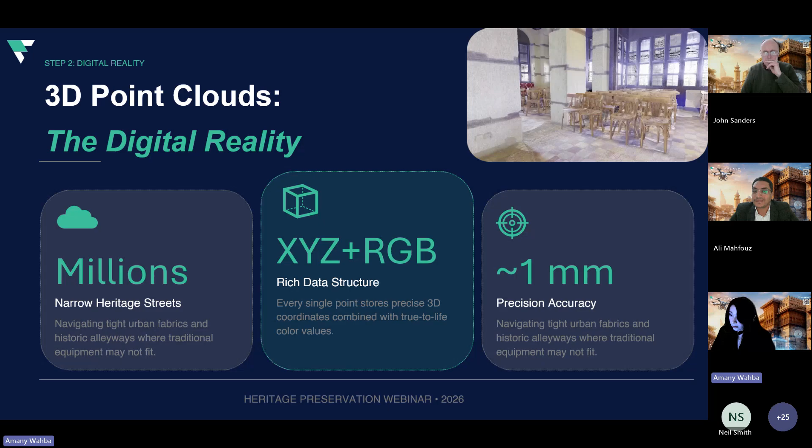It's a digital data set made up of millions, sometimes even billions of points, made up of x, y, z coordinates. Each spatial point represents the x, y, z coordinate, and also the RGB color that gives us this texture and the visual appearance that you're seeing on the screen. When all of these points are combined together, they form a highly detailed three-dimensional representation of the building exactly as it exists today.

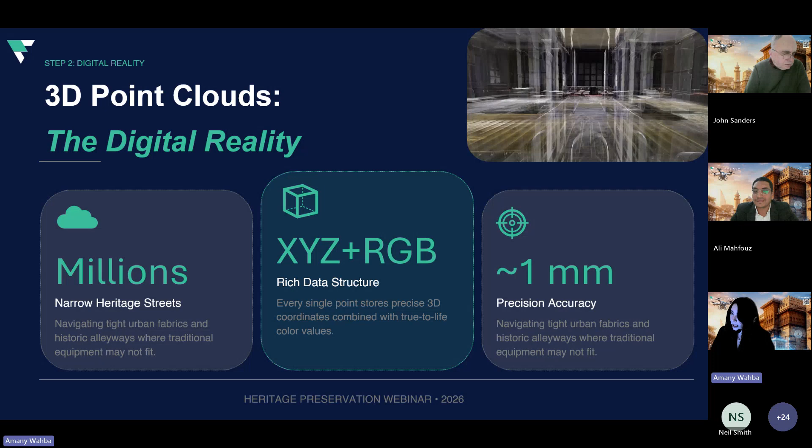For heritage documentation, this is extremely valuable because it captures the building in its real condition. Heritage buildings include irregularities, structural deformation, and fine architectural details. So making sure there are no gaps and capturing at millimeter-level accuracy is the key to having very good quality HBIM models.

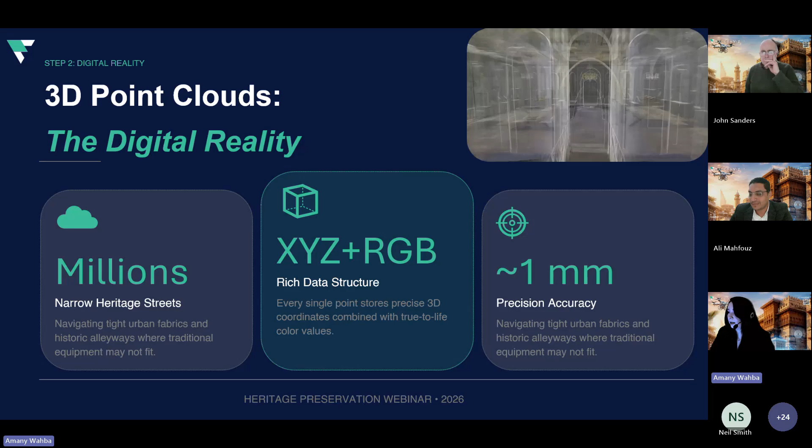For HBIM projects in general, we have two primary deliverables. We have the point cloud, and this data set is the foundation in creating the HBIM model. The second is the 360 imagery that I spoke about before, which provides visual documentation of the environment and allows the user to better understand the condition and appearance of the building. Together, the point cloud and the imagery form an essential data set used to create the HBIM model and the documentation.

In the next slide, I've been throwing the word HBIM around, but what is really HBIM? HBIM stands for Heritage Building Information Modeling. It is an adaptation of traditional BIM methodology, specifically designed for historic buildings and heritage structures. Unlike modern buildings, heritage sites contain very irregular geometry, their own historical construction techniques, and architectural elements that are unique to their cultural context.

That's great. So that takes us to another point. Once we collect all the data you mentioned, how is this data processed into CAD drawings, 3D models and HBIM deliverables? Perfect, that's a great question, Ali. Allow me to guide you through the following slides, with a nice visual presentation to follow along.

We have talked about the point cloud as the foundation for a complete HBIM model. Once the point cloud has been processed and cleaned, it becomes the main reference data set for the entire modeling process. We import these point clouds into modeling environments such as Autodesk Revit, and use the scan geometry as a guide to reconstruct digitally all of the architectural, structural, and MEP components.

Elements like walls, floors, roofs, and openings, everything you're seeing on the screen, are created directly from the point cloud reference. This ensures that the HBIM model accurately reflects the true geometry and proportions of the real structure, which is very important.

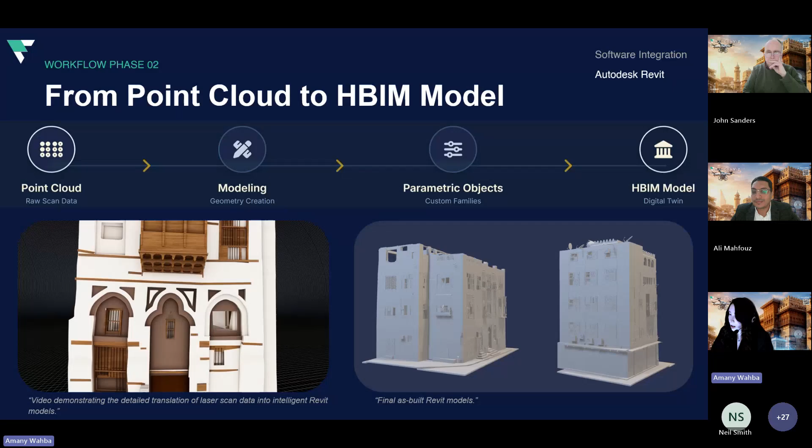In the video on the left, you see the steps of the workflow from point cloud into the 2D drawings, elevations, sections, and floor plans, and then from the point cloud into the actual Revit model. We're showing the untextured version and then the textured version. On the right are the final as-built Revit models. You can see the conditions of the slanted walls, the Rouchans and so on, all accurately as they exist on the real site.

Now, this is a very interesting slide to show right here because I feel like this is really the core of what truly separates HBIM from conventional BIM. So I'm now talking about the custom parametric heritage components. One of the key challenges in heritage modeling is that historic architecture rarely follows standardized elements, right?

For example, in Hijazi architecture, what you're seeing right here, we encounter unique features such as the Rouchans, which are the traditional wooden balconies, and also the decorative wooden elements known as the Takaleel. And of course, there are also the many unique historic windows and doors and even the historic walls. And with historic walls, the walls are irregular, right? They're not straight walls. They're warped, they're slanted. So all of this geometry is very uneven.

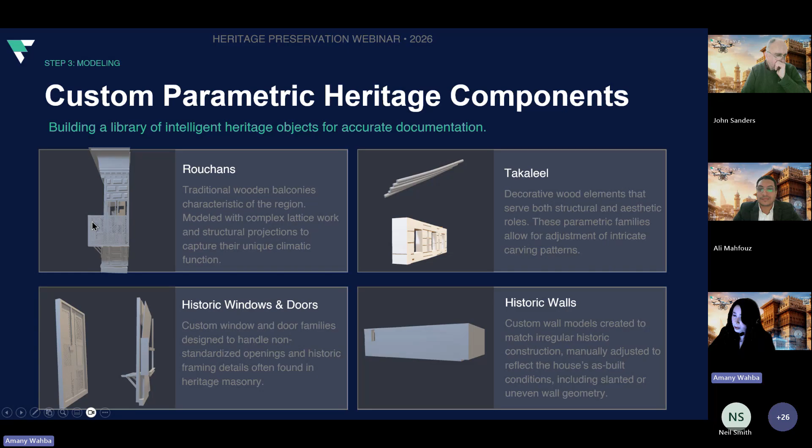It's also modeled within the HBIM family category. Because these elements are what really make it unique, they're not available in standard BIM libraries. So we have to create these custom parametric HBIM families. This really allows us to accurately model each architectural, structural or MEP element according to its real geometry and condition as well. You're seeing it right here in the Rouchans, how some elements are missing, broken pieces. All of this is accurately presented in the model itself.

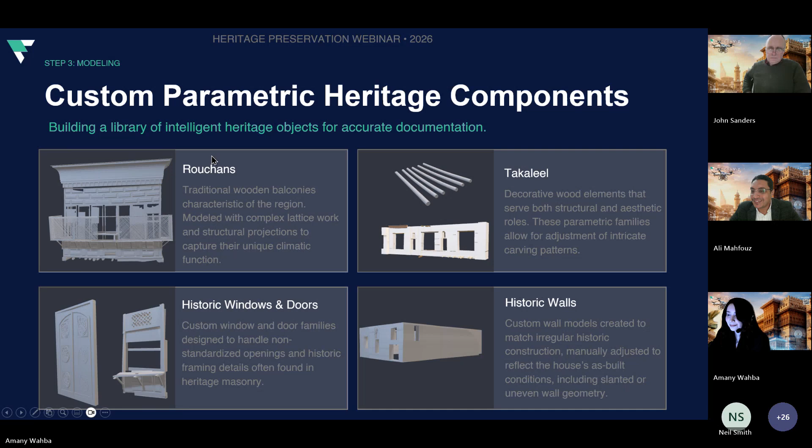That's great. So maybe someone asks: after we have 3D modeling and 2D and heritage building information modeling, what is HBIM? What's the importance of HBIM for heritage documentation? That's a very good question, of course. So we truly want to show what is really the value of HBIM, right? Why HBIM matters for heritage.

Yes. I really think that HBIM provides more than just a nice visual 3D model to look at, right? It really serves as a reliable digital record of heritage structures, and it can help in supporting restoration planning, for example. It can also help with structural assessments and long-term conservation strategies, right? The planning of conservation, enabling us to provide strategies by visualizing the decay, the patterns, the cracks, and whatnot.

So for heritage authorities and governments, for example, I feel like this information becomes a very valuable tool for managing historic sites and ensuring that they're preserved for future generations. But not only that, it also opens new opportunities for education, for research, for cultural tourism, right? By making heritage data more accessible through digital platforms.

Oh, that's great. Thank you, Amany. You're welcome. So I will move to John.

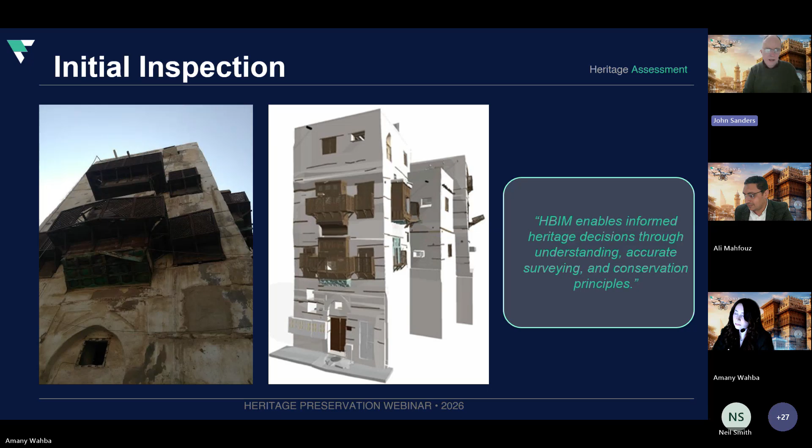The group of buildings at Al-Balad is complex because they were an intensely developed group within a limited area. The area was limited by the city wall. And they've been subject to repeated and frequent alterations as the use and status of the buildings changed. Many of these alterations are actually quite poor quality compared with the original construction. So both in conservation and aesthetic qualities, they're not as good as the original. The alterations tend to disguise highly significant elements in the original buildings.

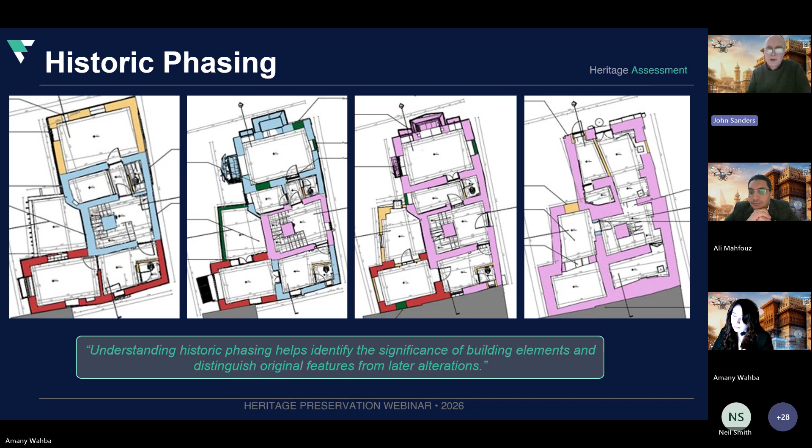So in doing that, we also produced phased elevations, which show typically this extent of alteration, same colouring as on the plans, but quite often Jeddah seems to have been a two-storey city originally and has consistently been added up with additional storeys to bring it up to 4 and 5 storeys. We'll look at the next slide, please.

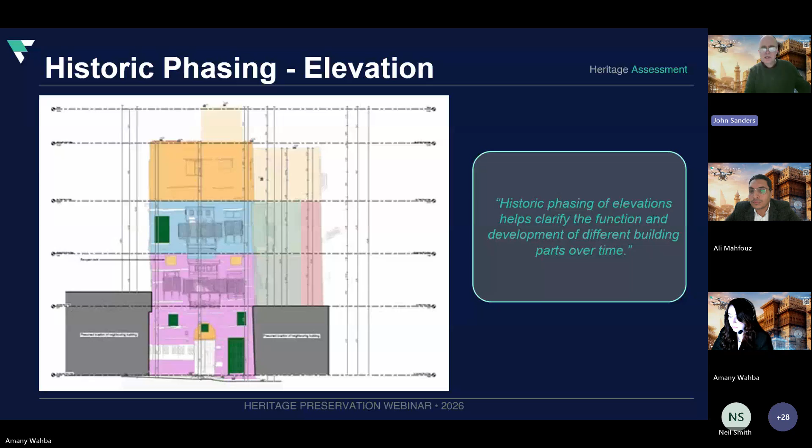So, as well as the history, a really important thing to record is the materials. Quite often that's quite difficult because the materials are covered externally and internally, but it was a crucial thing for our client to understand the materials. Quite a lot of it is coral stone, but we're also recording places where there are concrete floors, brickwork, timber. Maybe look at the next slide, please.

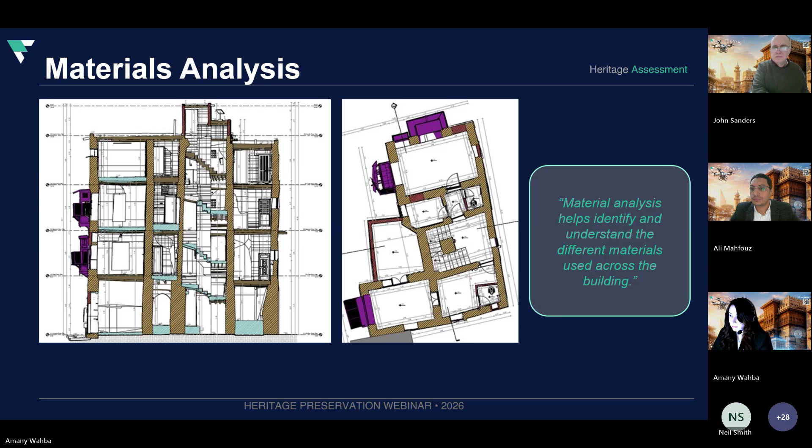So the understanding that we've developed of materials and history is summarized in this kind of significance assessment. We look at various types of significance, which includes the potential for intangible. That includes historical associations, which are intangible, but also how the building represents a historical type, in this case a merchant's house, the quality of the original and later design, and the particular character which the building might have taken on over time, and which makes it more interesting or more attractive with age.

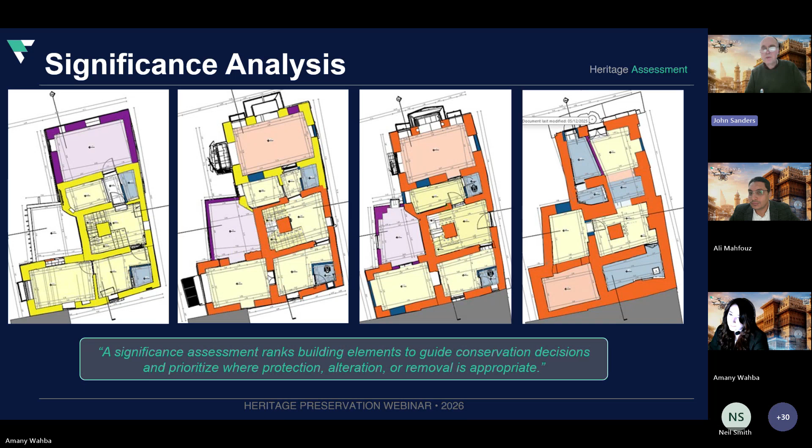The purpose of this significance diagram is to advise on good conservation decisions. We can show how conservation effort can be concentrated in the parts of the building where it really counts. We can avoid wasting our clients' money repairing parts of the building which would be better removed or changed anyway, and we can consider where parts of the building would be better restored to their original appearance, because this would reveal historic significance that is not necessarily evident at the moment. Let's look at the next slide. So another part of our job is to advise on how the building should be repaired.

Often this included structural issues. Many of the traditional buildings in Al-Balad are distorted out of position or have elements which are uneven. But this distortion can be part of the interest and character of the place because it is a function of the materials and construction techniques which were available to builders in Al-Balad before the 20th century.

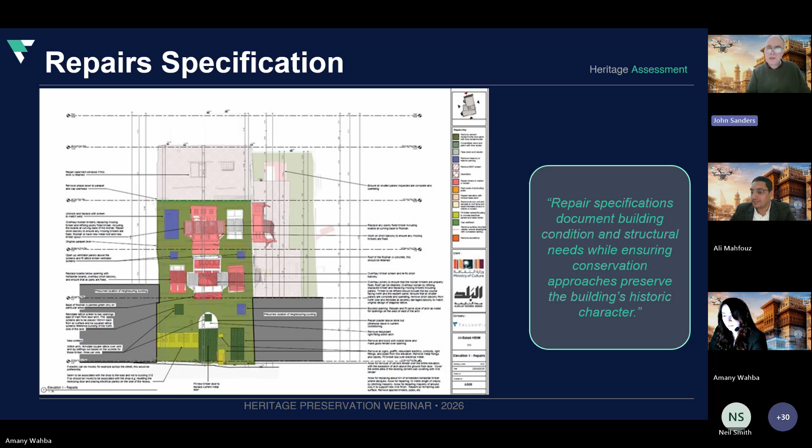We worked with conservation accredited structural engineers, NARO, as part of our team. And they were able to design structural solutions that retain distortion. And this is a specialism that is really important in conservation decisions. So we've plotted the full extent of repairs onto drawings so that the repairs to the fabric could be understood. Let's look at the next and final slide, please.

So in a way, these show the result of decision making. The image to the left is a similar building. This is the one that isn't actually building 310, but I've included it. And this image to the right is a drawing which is made over the FalconViz survey. And what it's showing is restoration, in that some of the decisions we can make could be to remove shops on the ground floor if we feel that that reveals the significance of the design above.

And in this case, missing Roshans are put back. But what we're not suggesting is that distorted Roshans should be straightened up, because part of the distortion is part of the real interest of the buildings.

I should say that this project has really been a wonderful experience, which has broadened my understanding of conservation and certainly brought me into more contact with UNESCO principles. It's given me an insight into a beautiful and vital urban culture, but it's also really interesting to see how our work and the work of FalconViz can produce a place which has changed dramatically even over the last 3 years that we've been working here, from a place that was almost deserted to a place that is already a really vital place for tourists with new businesses. And you can see how quickly conservation-based change is possible in Saudi Arabia.

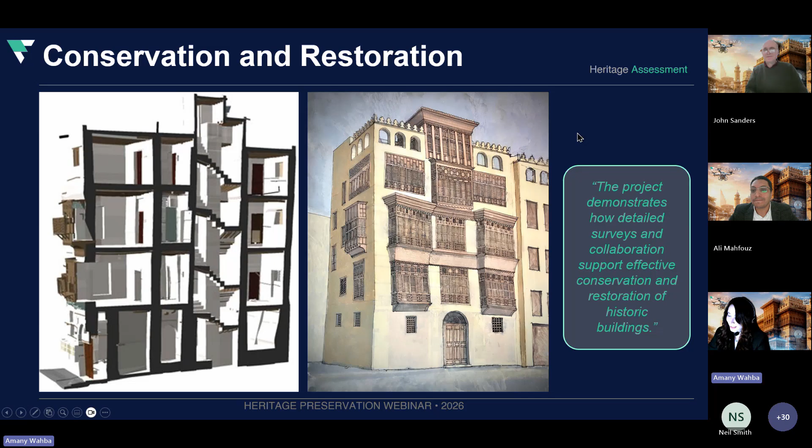So I will go back to Amany. So we collected data, Amany, and we have 3D and 2D, and HBIM. So my question is, can you describe the HBIM platform development process? I mean, how do you move from the concept of brainstorming to the final product? Yes, of course, Ali, I'll be happy to walk you through that. So, once all the documentation data has been produced, so I'm talking now the HBIM models itself, all the 2D drawings, all the imagery, all the reports, including the structure reports assessment that John was just talking about, the next challenge really becomes how can we manage and access all of this information in an efficient way, right?

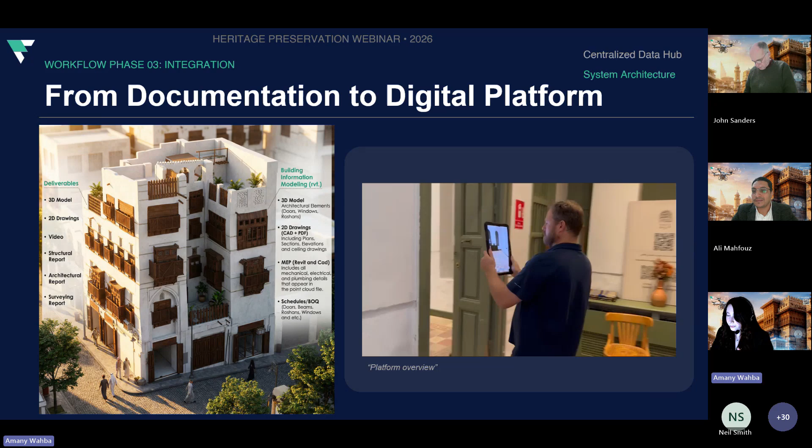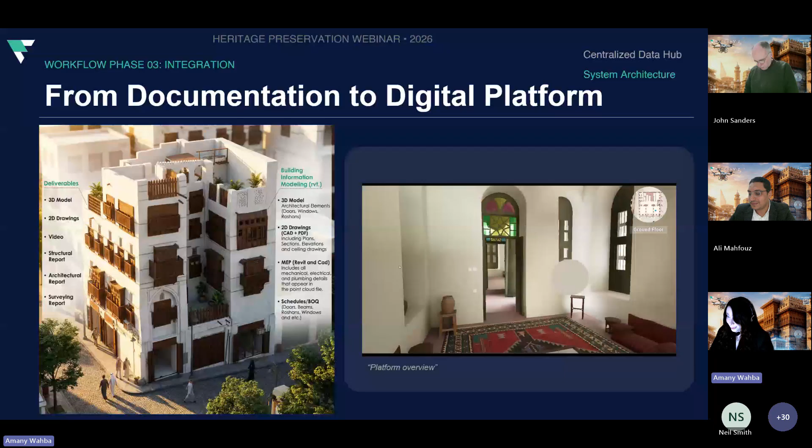Yeah. So what you need to understand is that heritage projects really generate a large amount of complex data. So without any kind of centralized platform or system, this information can really be difficult to organize or even explore. So in order to address this challenge, we decided that we wanted to develop this HBIM platform, which can integrate all of these data sets into a single digital environment. So that was really how we came up with the whole digital platform.

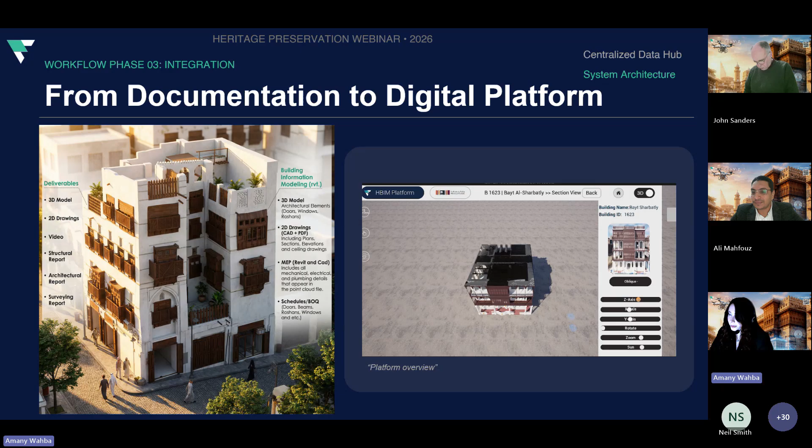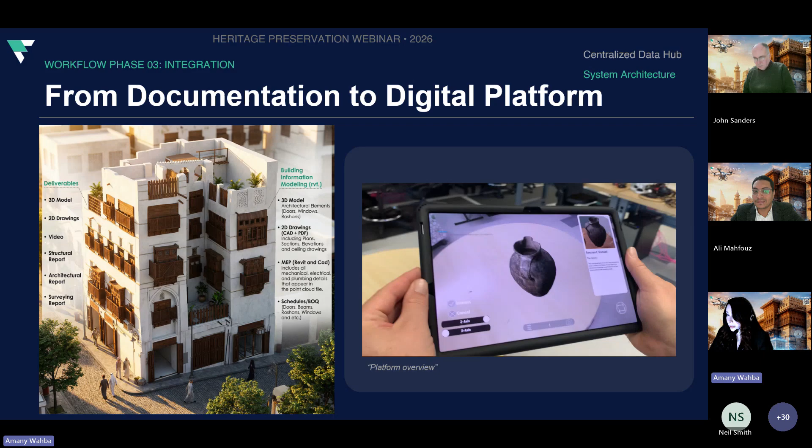And as you can see right here on the right, there is a very quick overview snippet of the platform. And on the left here is basically all of the documents that we have gathered in this entire HBIM model project in order to be able to integrate it. So part of the integration process is, of course, the platform design, right?

Basically, the whole development of the HBIM platform just began with a series of lots of brainstorming sessions. These all involved, of course, the heritage experts, developers, engineers, and we all sat down to try and brainstorm what kind of navigational structure or data we want to show, the data sets, and also what kind of features we can implement, right?

So really the goal was to design a centralized platform where different types of heritage documentation can all be accessed, visualized and explored in one place. So all of this collaborative process really helped us in defining the whole structure of the platform and eventually what kind of data we need to integrate.

Oh, fantastic. So once the concept development is established, we now move on to the next step, which is designing the user experience, right? Yeah. So what you're seeing right here is that we have started developing the user interface and user experience wireframes to map how users would navigate through the platform. These wireframes would really help determine how the buildings can be displayed, how documentation can be accessed, and how users can interact with all of this information. We have thought about all of this.

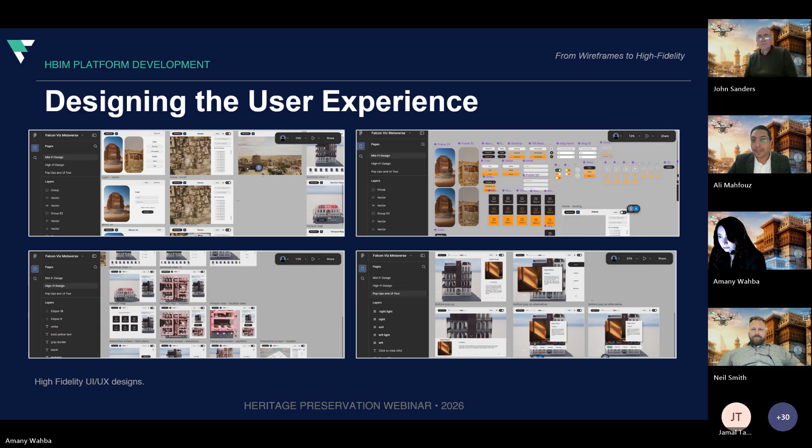So you raised a very important point about usability and complex heritage data in the platform. Can you explain more about how you integrate complex data into the platform to ensure usability? Because usability is the most important thing in this platform. Yes, of course, I'll be happy to walk you through that.

One of the biggest technical challenges we faced in developing the platform was to integrate the different types of heritage data that we have captured or gathered. The project includes all the HBIM models, the point clouds, the imagery, the reports, and all the historic documentation, and the platform was designed from the get-go to combine all of these data sets into a unified environment. This integration allows users to access and explore the information in a seamless way without the need to switch between multiple software tools.

And this was very important because the whole point of creating this platform was to avoid any kind of external links, any jumping from one platform to another. We wanted to make sure that we optimized, enhanced, and thought of all the useful solutions in order to integrate everything into one digital platform.

And I would also like to add that, to really push it to the next level, we said, okay, to make this platform more engaging and accessible, what other features can we include to enhance the whole experience? So we decided to introduce several interactive features, starting with AI avatar guides. We have an AI guide who can act as a virtual tour guide and help visitors learn more about the history and significance of the heritage site.

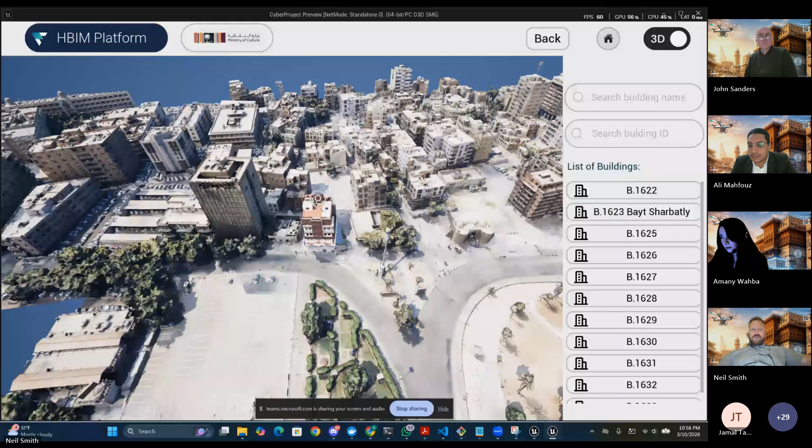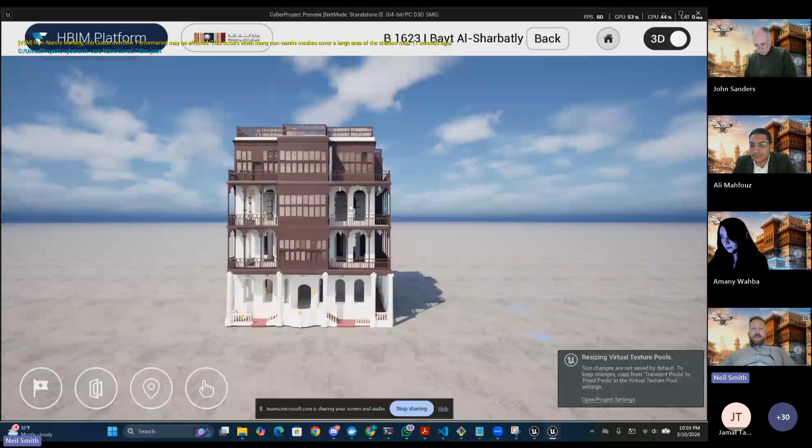And the idea that we first started with is that we want to tie everything to the core database. So as you can see here, we have a list of many of the different sites that we've actually fully created HBIM models of. And you can select one, like for example, Bayt Al-Sharbatly, and you can enter into that building. And once you go into this building, it allows you to see it spatially, but also we isolate it. So you can see now it's isolated, and this allows you to do in-depth study of every single building that we've documented.

And really, just to give a little background, one thing that I've faced over and over again is, as you saw earlier in the presentations, we have these amazing 3D models of this data. And usually our final deliverable to the client that they use the most is a PDF. So that means all of these beautiful 3D models, all the interactivity that's possible, gets distilled down into a PDF. And the PDF is incredibly valuable and usable, but it's not that engaging. And so what we want to do is for the HBIM platform to embed all of the data of the PDF into a 3D environment. So now you have the best of both worlds.

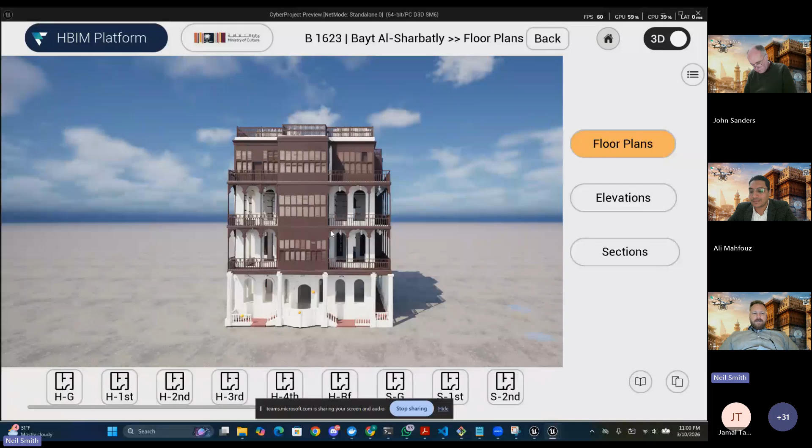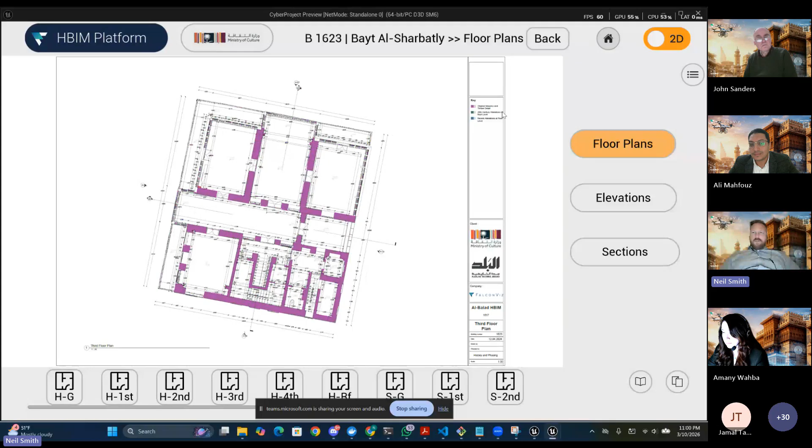So as you can see here, we've isolated this building, and I can pick different areas. So I can say, for example, I want to see the first floor, and it'll take you to that floor and slice the building. But you can also switch to 2D. So now we're showing that exact same 2D plan that was tied to the PDFs, but you can also see it in 3D, and I can switch, of course, to the different levels. So I can go up to the third level. I can switch back to that level in 3D.

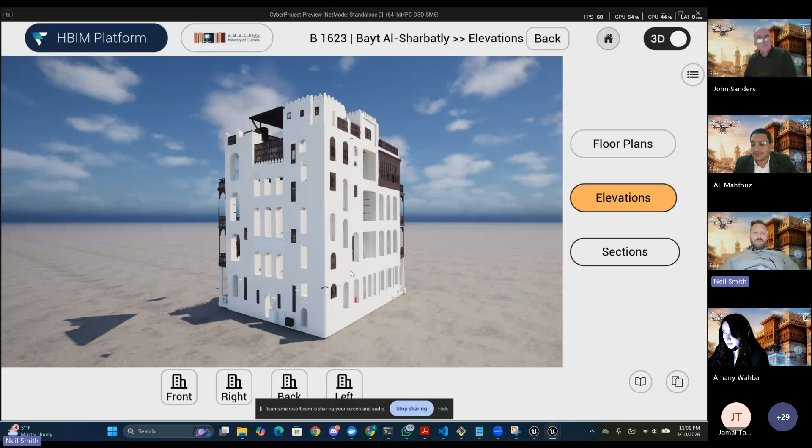I can go to side view, such as a section, for example, we'll do elevations, front, right. I can switch that to 2D and see the 2D view, the right. So one of the first things that we did with the HBIM platform is being able to fully see the entire building, both the 3D model and the 2D overlays, and get that understanding, that spatial context to it.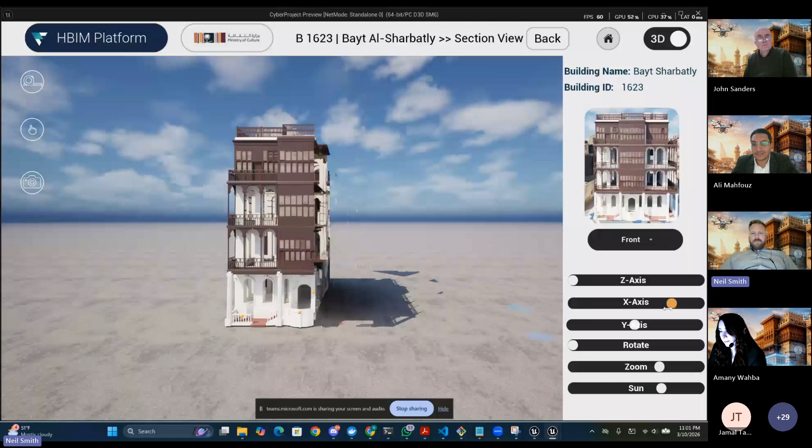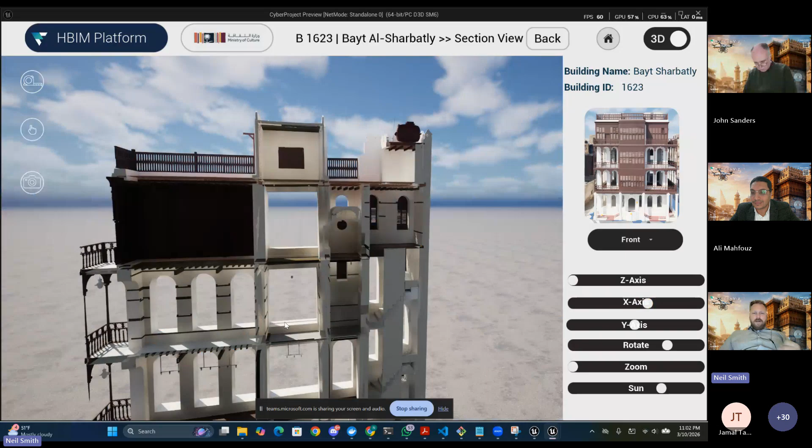We went beyond that to add a tool that allows you to fully interact and examine the site. So here you can slice the object at different dimensions, like you can see here. Slice it from this angle. I can rotate it to examine this area right here. I can zoom in to see it exactly. I can even control it with my mouse and basically fly around the site if I wanted to examine different areas and slice it according to the different layers. So all the type of 2D slicing that we saw before in the PDFs, now you can do on the fly in 3D and study it at a much greater level of detail than you could before.

We can even do things such as adjusting the sun. So if I go back, rotate back to the front and zoom back out, and let's just bring in the whole thing. I can adjust the sun so you can see it at different times, at night, during the day, and see how shadow is cast across the building and so on. This allows a whole other level of understanding of the building that's not possible with just a 2D PDF.

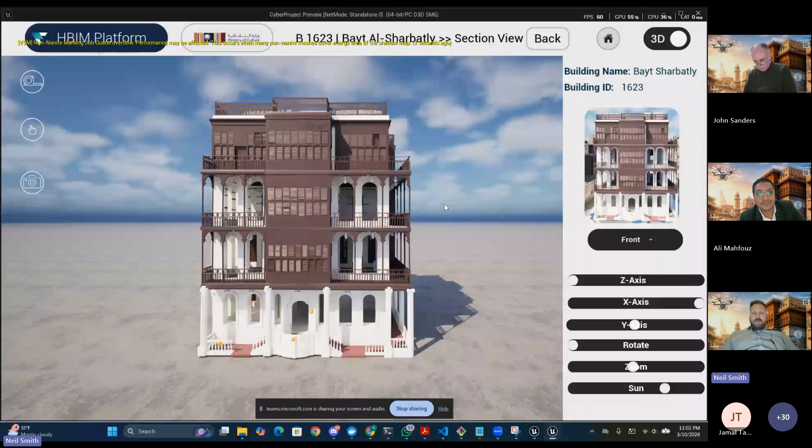Finally, I want to show you the key integration with our structural data: all of the structural information that is collected in the PDF is now digitally stored in a database and retrievable. So for example, I can show you here, this is one page of the PDF of the structural assessment that was done by Simpson and Brown. And you can see this is referring to that building. It's elevation 1. You have this little marker here.

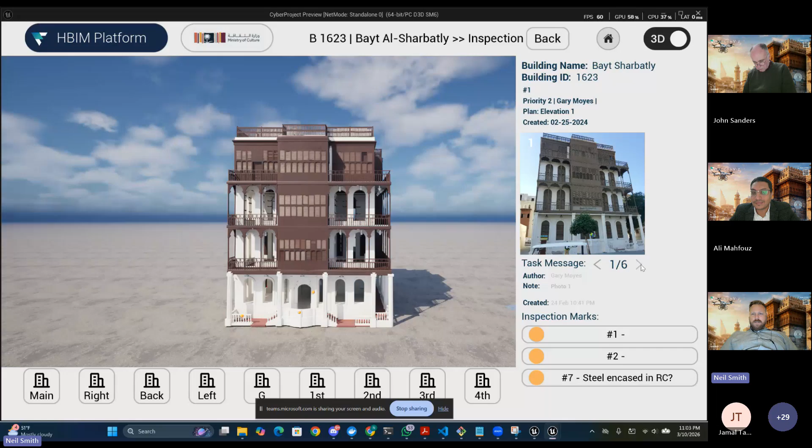You have these images, but now you can get a much better 3D spatial experience where you can see the same model, which is this one right here. And I can swap through the images. I can see the notes related to that. I can say, for example, I want to examine this one right here.

So this is another steel encased in RC, and I can swap through the images to see the results, such as the deterioration and errors right here that need to be fixed. So all of the inspection details that were originally in that PDF, now we have a way of storing it in the HBIM platform and tying it to the 3D.

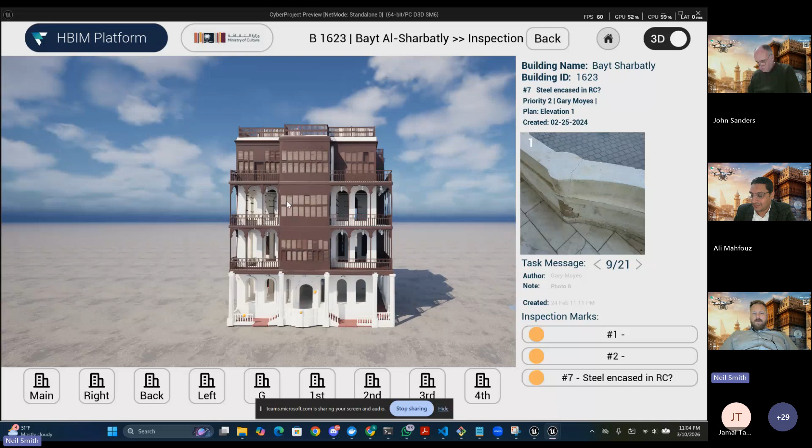And so this is the first start that we did with the HBIM platform, taking all of that structural information and key information and putting it into a platform so that you no longer have to return to the PDF. Everything is contained within the platform. And this can be done for every single site, every single area that we want to. And then the last thing I want to show you is

the AR 3D experience. So this is the AR version of that same environment where you can actually go through the site. And as you can see right now, everything is black. The reason why it's black is that in AR, you actually capture video from the camera, and you'll be able to see the actual building. So we could walk through the building and you would actually see the building.

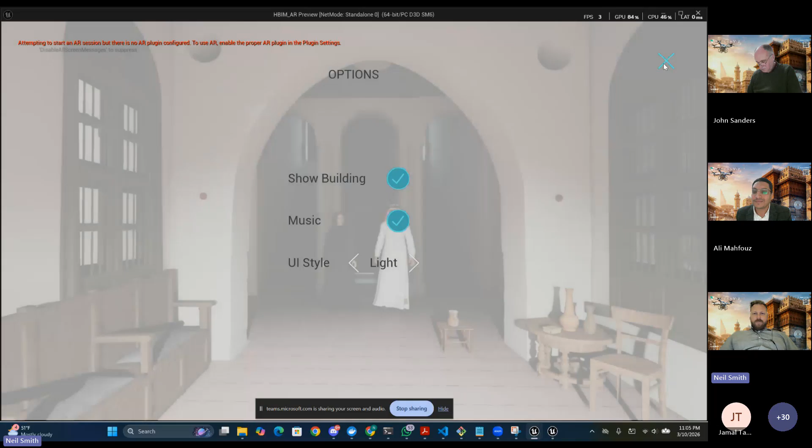And this little checkerboard right here, you actually align to the different rooms, and it will perfectly sync your AR experience to the actual 3D space that you're walking through. If you watched the video I showed before, I was actually synchronized with the actual environment so I could see everything. But since I'm not at the building, I'll just go ahead and turn on the full 3D model. So here you can see the full 3D model of the different rooms, and we have our two avatars here. So I can click on any avatar.

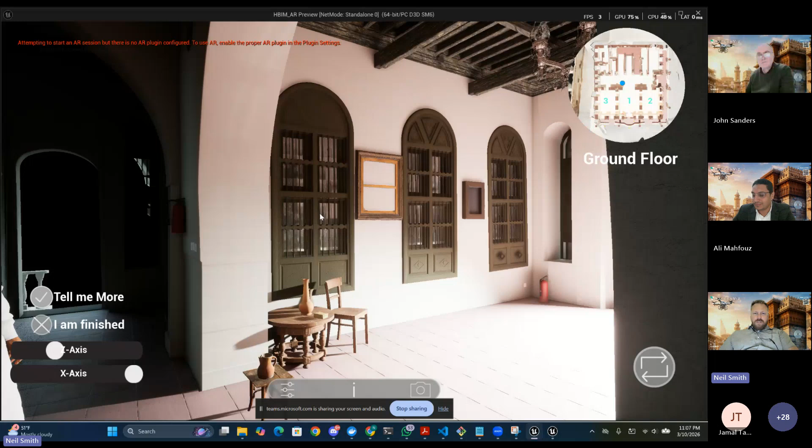And what's nice about the HBIM platform is that we can ingest all the buildings now. Of course we don't have time to go and explore many of the other buildings, but this just shows you the capability and the scalability of such a platform to be able to transform any HBIM type project into full 3D immersive environments. And from that, I will stop sharing and hand it back to you, Dr. Ali. Yeah, that's great. Great effort, actually.

So I have one question for you, Neil. If I am a decision maker or a researcher, how can stakeholders like government entities or researchers benefit from using this platform? Yes, so really our vision with the platform is to make it a tool that's usable for every different group, every different

entity in Saudi Arabia. And this really comes from my research that I was doing even before I founded FalconViz. I call it cyber archaeology. The goal of cyber archaeology is to employ these digital and computational methods to create immersive collaborative environments so that we can better study the archaeological record or cultural heritage.

With that, there's really four key things that we envision the HBIM platform allowing you to do. It allows us to tie all the acquisition work that you've seen to curating the data in an organized way, to providing all of the tools to do the analysis, and finally, to be able to disseminate it to the public. And of course, as you saw with the HBIM platform, we can do both. We can both create all the analytical parts of it, like studying the structural report in 3D, but we can also create these virtual tours that the public would be more interested in.